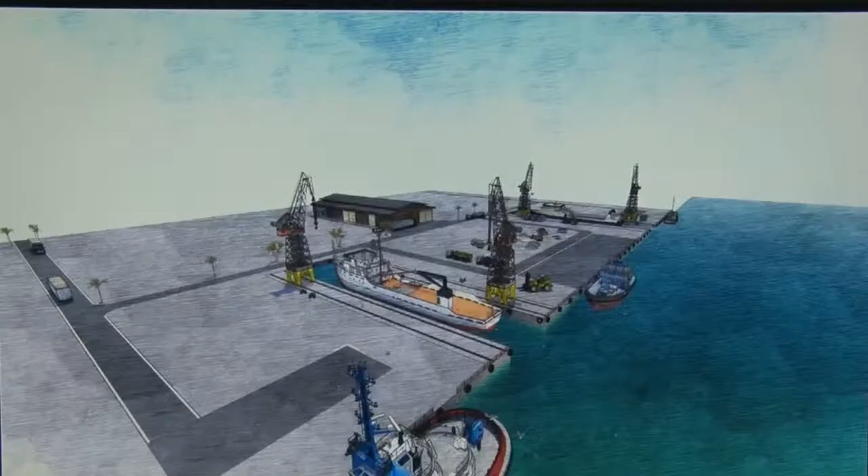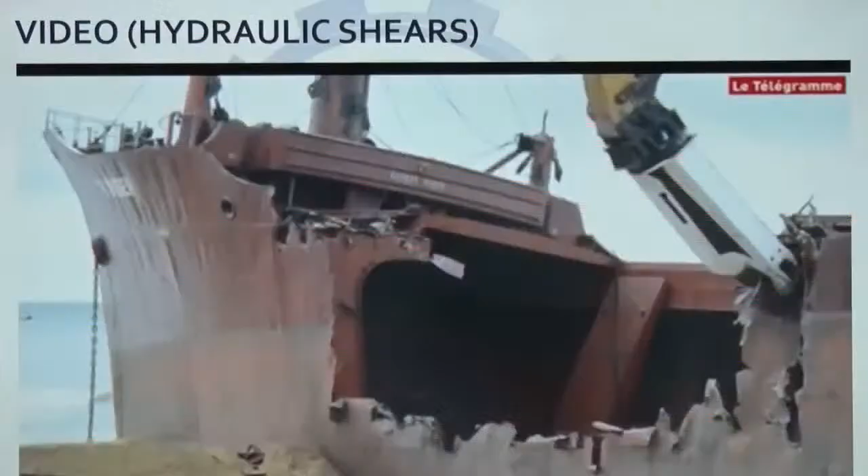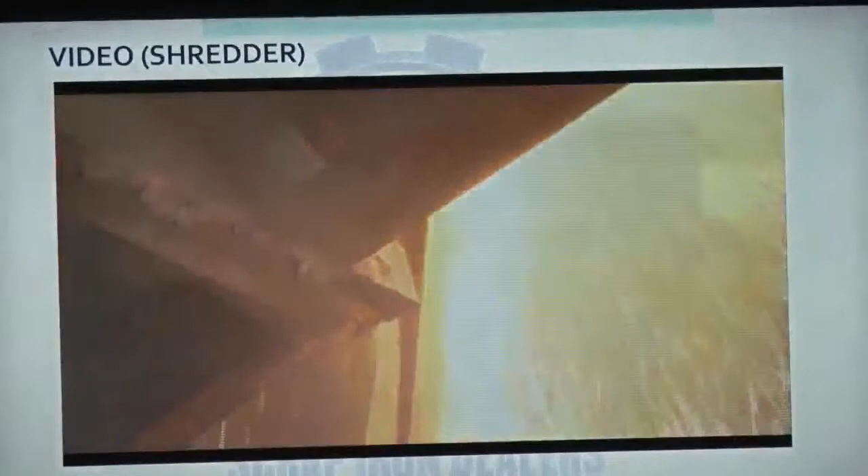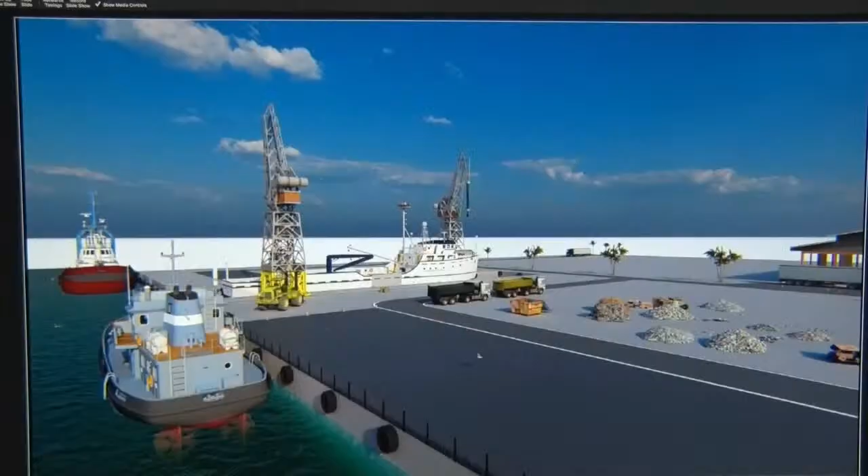This is our site proposal, our site plan. And here you can see fragmentized bits, heaps of material. We see a ship in port, and what happens in shipbreaking? The ship is cut using hydraulic shears. It's fed, that cut piece is fed into a shredder, and then we get that fragmentized bit heap. Now, the heaps are very valuable to us, that is where the value lies.

This is just another view of our port. You can see clearly the gantry cranes, and here we can see it's a two-port proposed operation, so simultaneous cutting operations or breaking can occur simultaneously.

The executive summary: the shipbreaking industry was analyzed. Marine, shoreline, and land equipment was looked at both locally and internationally to determine the best way forward to set up a shipbreaking facility using some of the most advanced technology in the shipbreaking industry. The study looked at different forms of shipbreaking in different lands as far as Turkey, England, and the United States, among others, where the methods employed ranges from labor-intensive to the use of high technology.

It was found that the use of technology quickened the time to scrap ships, thus making this industry a very lucrative one. In addition, it was found that there was no shipbreaking industry in Trinidad and Tobago, the immediate Caribbean, and on this side of the equatorial belt.

The recommendation to government, to viewers, to investors, is to support, allow TTSIDA lands, funds, and permission through its agencies to operate a shipbreaking facility in Trinidad and Tobago, using innovative technology to fast-track shipbreaking, and yet be competitive on the world market. This project will rid the sea of unwanted derelicts and other waste at no cost to the government, and is pivotal to a sustainable environment.

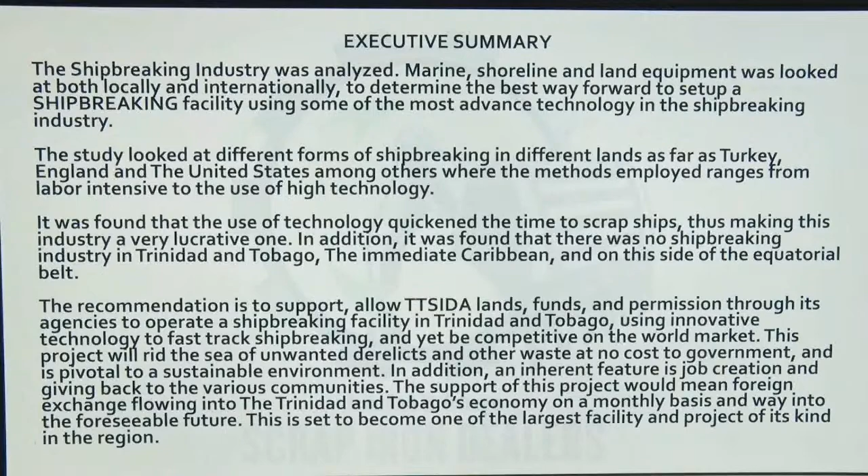In addition, an inherent feature is job creation and giving back to the various communities. The support of this project would mean foreign exchange flowing into the Trinidad and Tobago's economy on a monthly basis and way into the foreseeable future. This is set to become one of the largest facilities and projects of its kind in the region.

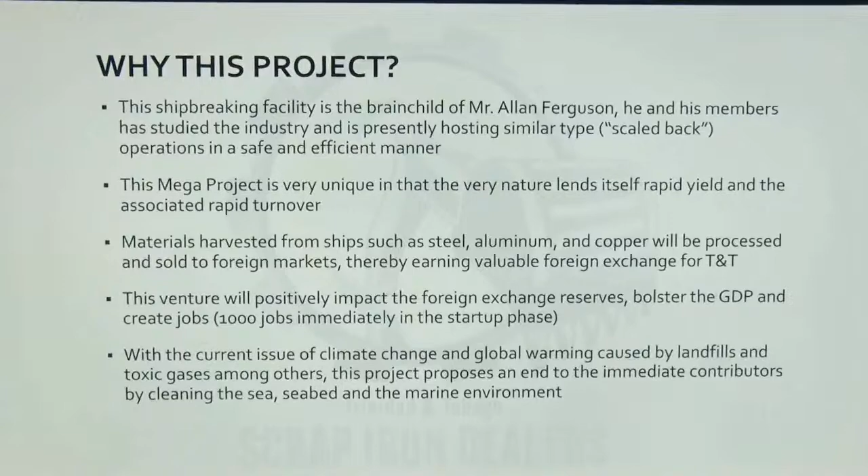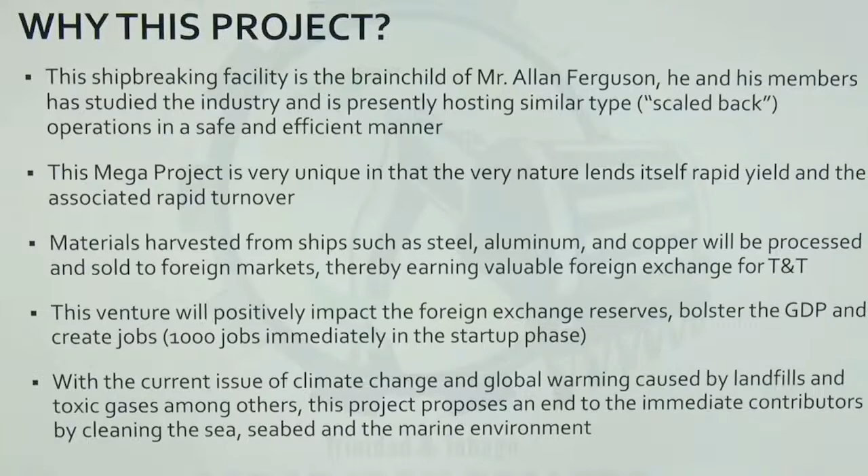Why this project? This shipbreaking facility is the brainchild of Mr. Allan Ferguson. He and his members have studied the industry and is presently hosting similar type scaled-back operations in a safe and efficient manner. Scale-back in terms of, yes, we have yards, so we test the mega project first by safe operations in our yards.

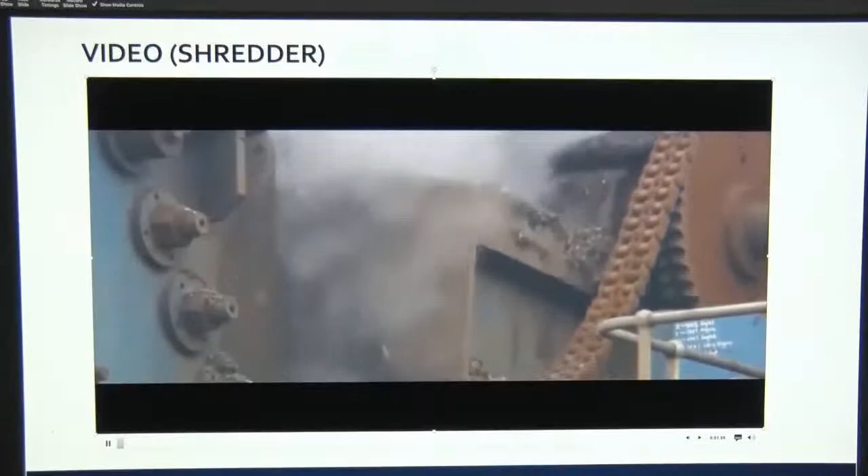This mega project is very unique in that its very nature lends itself to rapid yield, in terms of the fragmentized bits, which has the value and the associated rapid turnover - that is the monetary aspect through sales. Materials harvested from ships such as steel, aluminum and copper will be processed and sold to foreign markets, thereby earning valuable foreign exchange for T&T.

This venture will positively impact the foreign exchange reserves, bolster the GDP, and create jobs - 1,000 jobs immediately in the startup phase. With the current issue of climate change and global warming caused by landfills and toxic gases, among others, this project proposes an end to the immediate contributors by cleaning the sea, its seabed, and the marine environment.

More on why: this project will enhance all areas of sustainability, namely social, environmental, and lend to positive economics. Social - people. Environmental - planet. And of course, this means a positive turn for Trinidad and Tobago.

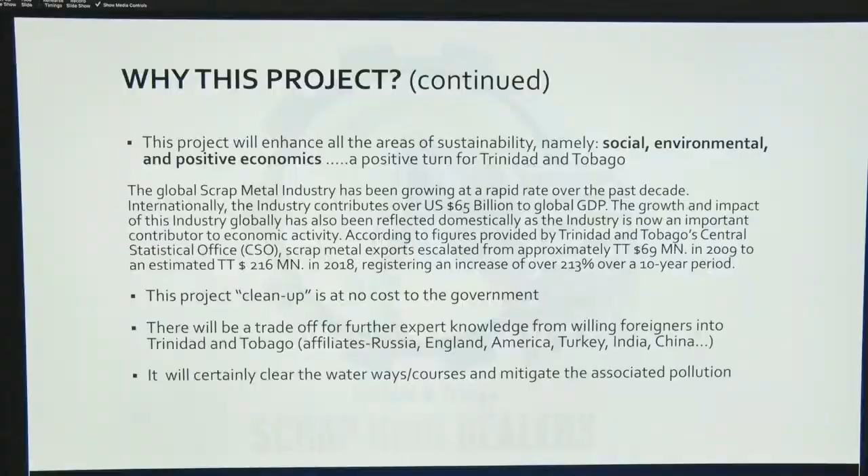Some statistics from the Central Statistical Office say that scrap metal exports escalated from approximately 69 million in 2009 to an estimated 216 million in 2018, registering an increase of over 213% over a 10-year period. TTCDA played an instrumental role in these statistical figures.

Why? This project will clean up the coastal waters of Trinidad and Tobago at no cost to the government.

Another point: there will be a trade-off of further expert knowledge from willing foreigners into Trinidad and Tobago. Our affiliates come from Russia, England, America, Turkey, India and China, amongst a host of others. This will mean an exchange in technology. We will gain. It will certainly clear the waterways and mitigate the associated pollution.

Some history and background: Mr. Ferguson has prior experience in shipbreaking. He owned and operated a shipyard in Carenage, in which the members were involved, so he trained his people. So TTCDA could stand safely, firmly on his footing to say, we want this mega project.

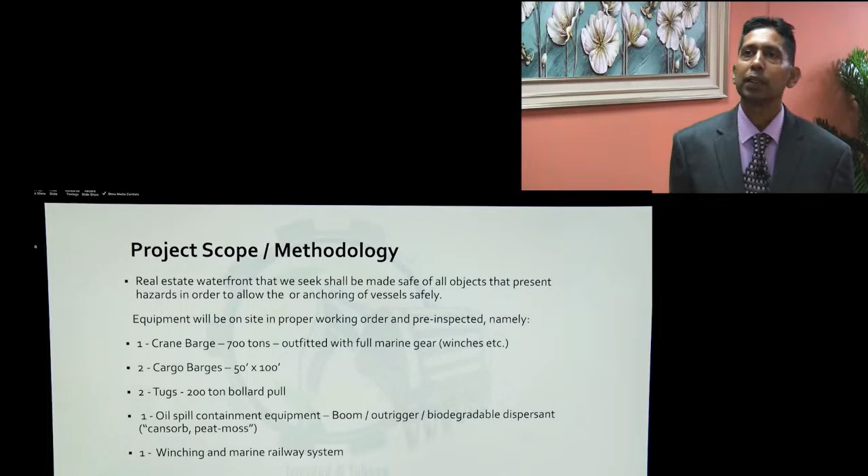Equipment will be on site in proper working order and pre-inspected, namely crane barge, cargo barges, tugs, oil spill containment equipment complete with its boom, its outriggers and dispersant, winching and marine railway systems, telehandlers, excavators, lift trucks, cranes both fixed and mobile, our shredder. We have as well trucks, complete cutting sets, and industrial scales.

With using this equipment, we consider the focus. On startup, we focus on land and shoreline operations. Once the vessel is docked, towed or winched close to land or onto land, checks are made to ensure safety, and the vessel is cleared of all liquids, chemicals and hazardous substances in a safe manner using the EMA guidelines and international standards.

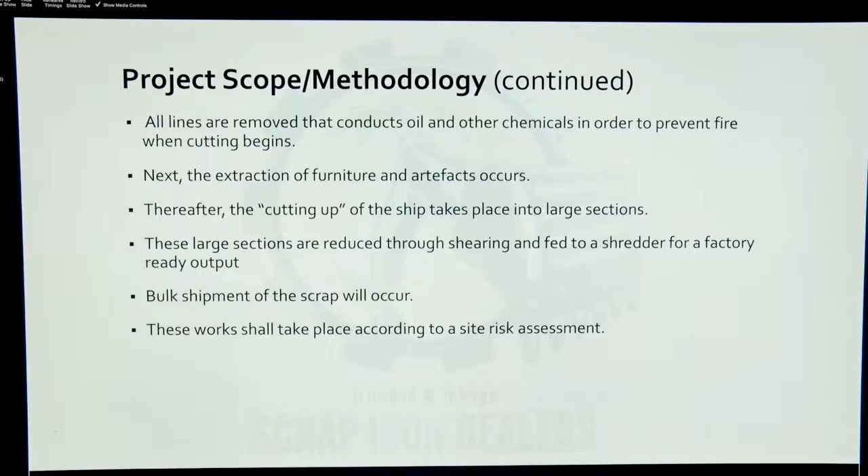All lines are removed that conduct oil and other chemicals, in order to prevent fire when cutting begins. Next, the extraction of furniture and artifacts occurs. Thereafter, the cutting up of the ship takes place into large sections. These large sections are reduced through shearing and fed to a shredder for a factory-ready output. Bulk shipment of the scrap will occur. These works shall take place according to a site risk assessment.

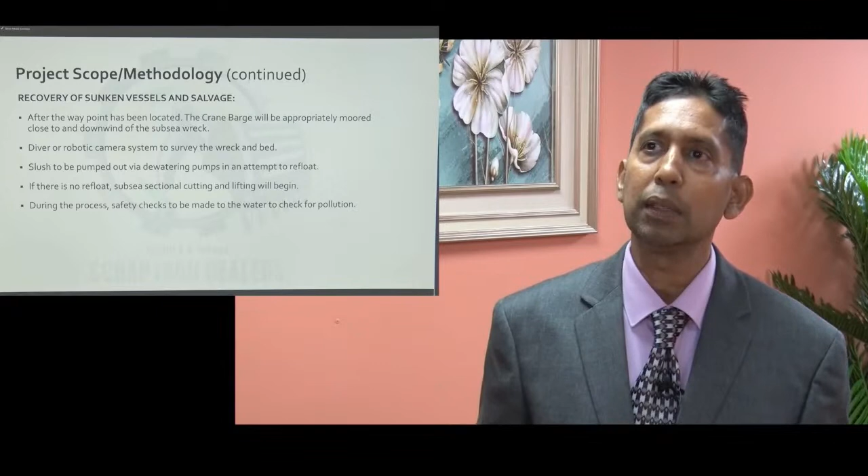On the ongoing phases after phase 1, we shall have recovery of sunken vessels and salvage. After the waypoint has been located, a crane barge will be appropriately moored close to and downwind of the subsea wreck. A diver or robotic camera system is sent in to survey the wreck and bed. Slush is to be pumped out via dewatering pumps in an attempt to refloat. If there is no refloat, subsea sectional cutting and lifting will begin.

During the process, safety checks are to be made to the water to check for pollution. Once there is no pollution, cutting in sections can begin via torch or chain system. During cutting, the crane shall hold steady the wreck at key points to enable stability and the safe lifting thereafter of the cut section.

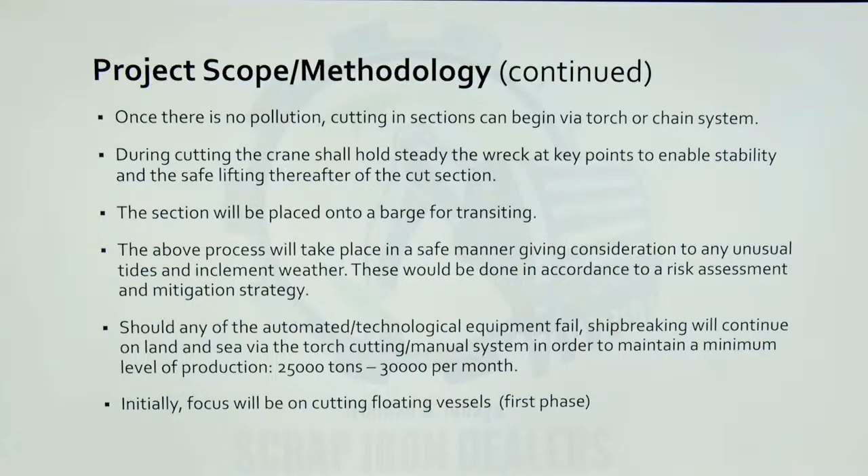The section will be placed onto a barge for transiting to shore, where it can be shredded up and made into that valuable fragmentized bit. The bits will end up in heaps. The above process will take place in a safe manner, giving consideration to any unusual tides and inclement weather. These will be done in accordance with a risk assessment and mitigation strategy.

Should any of the automated or technological equipment fail, shipbreaking will continue on land and sea via the torch cutting or manual system, in order to maintain a minimum level of production between 25,000 tons to 30,000 tons per month. Remember, initially the focus will be on cutting floating vessels only.

We now have a video of the hydraulic shear.

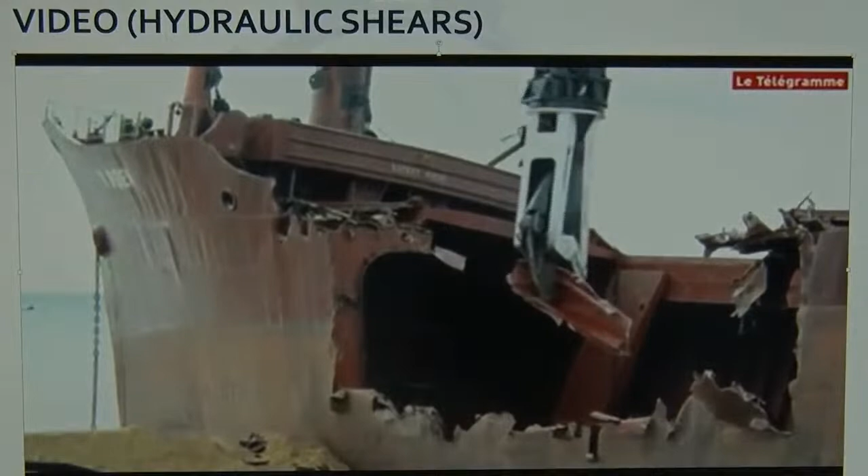Now we have a video of the shredding process. You can see our shredder.

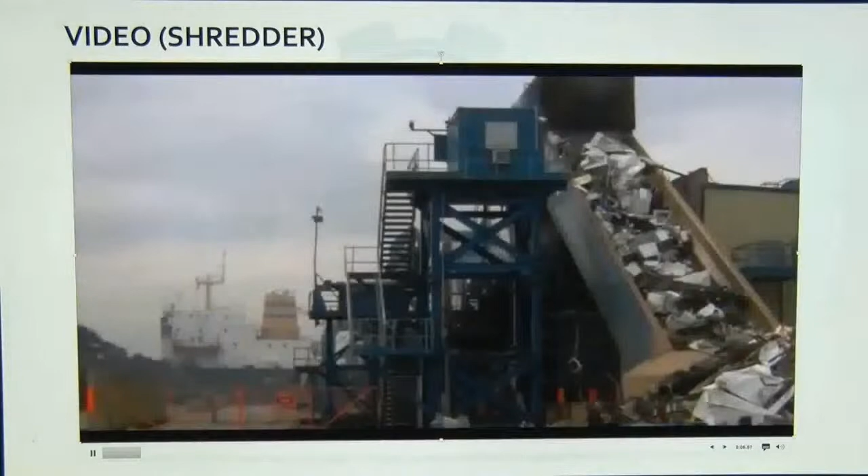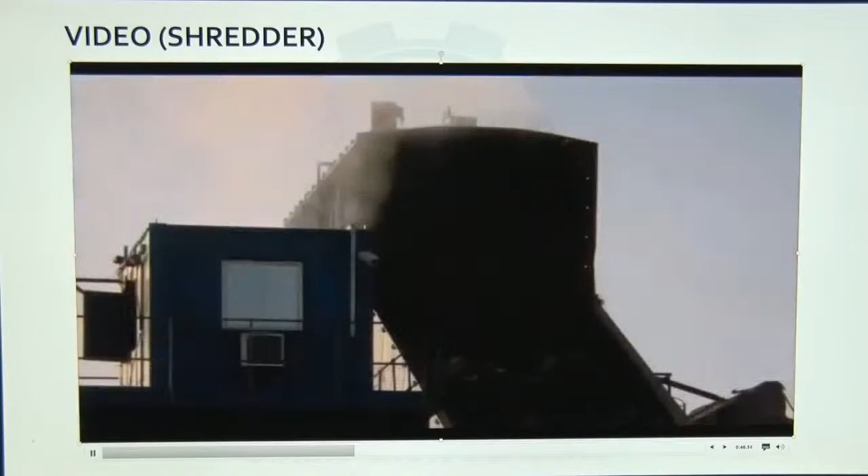This is the best shredder in the world, and it faces a world-class challenge. A giant freighter powers towards the docks, but it can't stay long. This ship must leave in 72 hours, complete with 27,500 tons of top-quality metal splinters created by the shredder. Producing the payload fast enough will push this industrial giant to its limits.

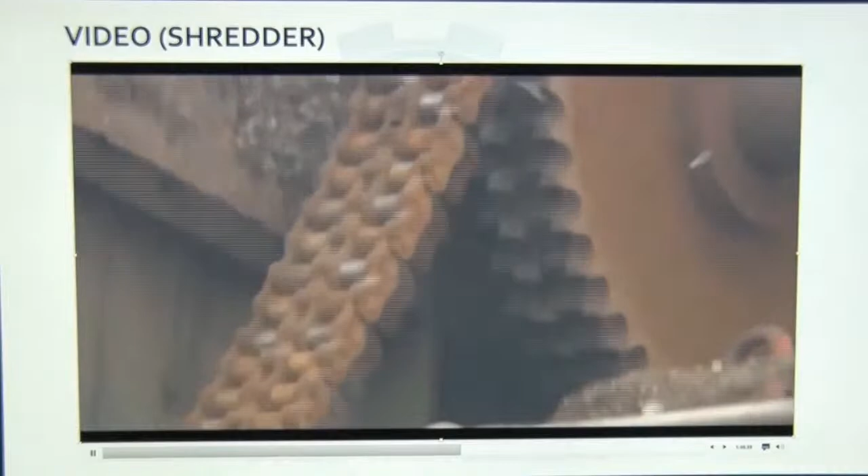A 560-ton giant of heavy industry, this shredder smashes 350 tons of metal to pulp every hour. The power from this industrial machine...

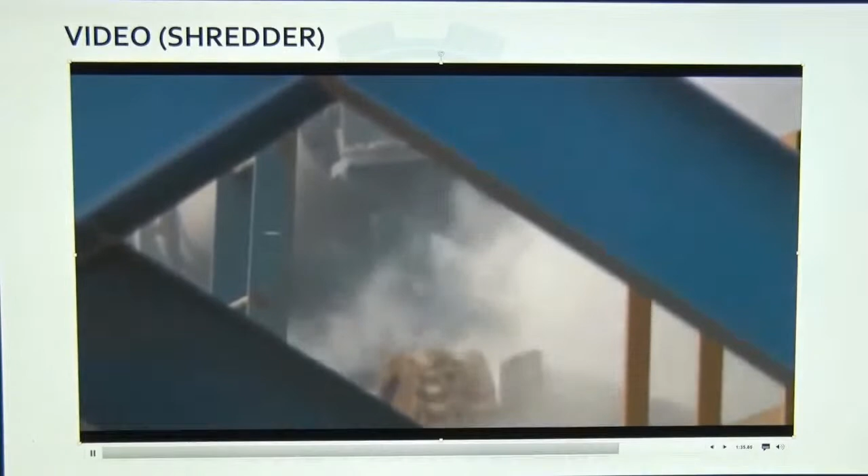We call it fragmentizing. It's actually what they call a fragmentizer. So what happens is you've got a big hammer spinning round, and you've got a load of grids. The scrap goes into the middle, the hammers come round, smash it, and eventually force it to a set of grids. Once it falls out the grids, the material actually separates out.

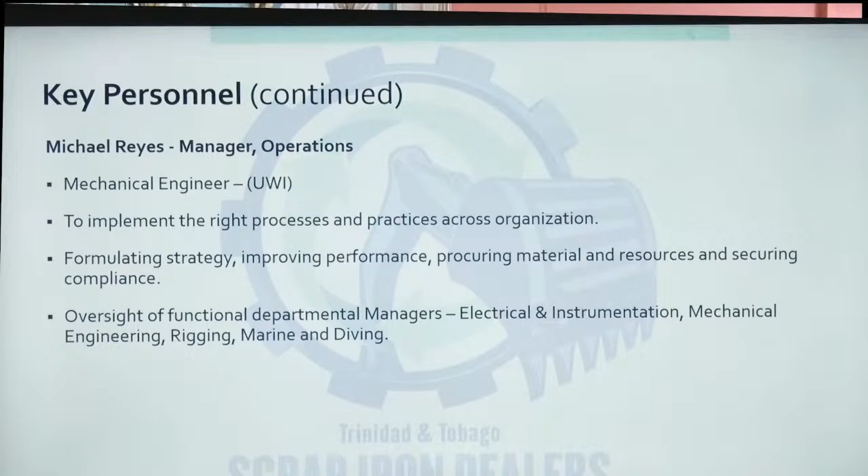We have our Vice President, Mr. Eros Sijatan. We have our Health, Safety, Security, Environment and Quality Director, Ms. Amanda Harilal. We have our Operations Manager, Mr. Michael Reyes. We have our Civil and Mechanical Engineer, Mr. Ronald Ayong.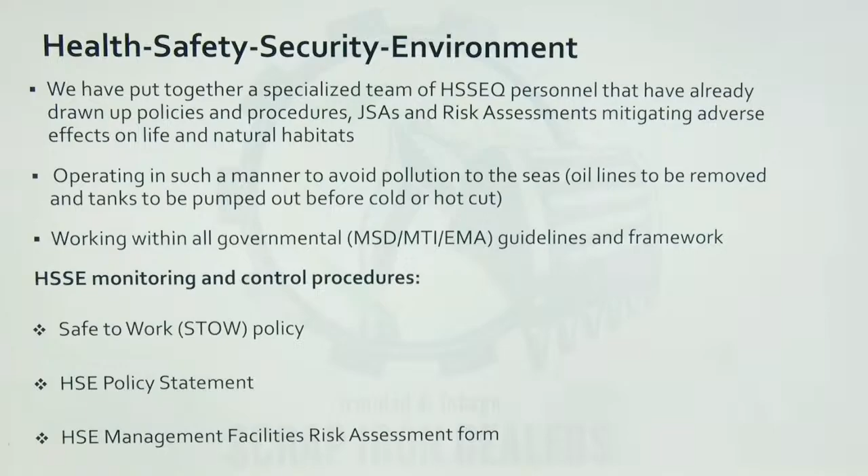We'll be operating in such a manner as to avoid pollution to the seas. We'll be working within all governmental guidelines and framework. The regulating bodies are the Maritime Services Division, the Ministry of Trade and Industry, and the Environmental Management Authority.

Some of our monitoring and control procedures are our Safe to Work policy, our HSE policy statement, HSE management facilities, risk assessments, equipment control procedure, disciplinary action matrix, and contractor management procedure.

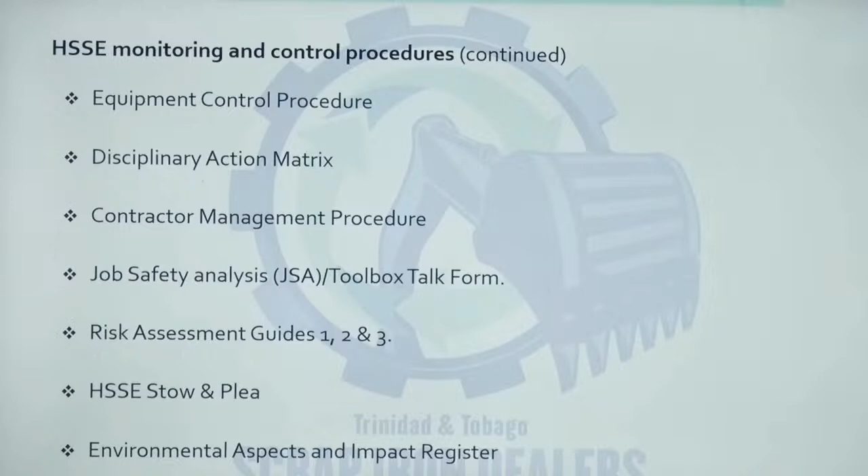HSSE Stow and Plea, environmental aspects and impact register, and we are guided by OSHA's risk hazard matrix.

We want to be in the green zone at all times, sometimes in yellow, but mainly in the green zone.

We have our risk management plan put in place. Here we mitigate risk, we accept risk, we transfer risk, and also avoid certain types of risk.

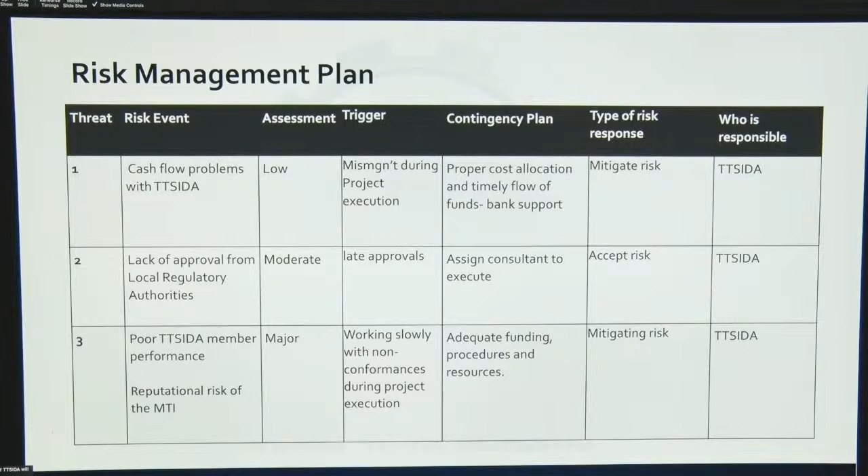Our financial input for startup is 30 million. 30 million.

So to recap, this mega project, our ship-breaking project, will save the environment, will immediately create jobs, will bring in the much-needed foreign exchange, will encourage recycling. At what cost? All of these will be at no financial cost to the government.

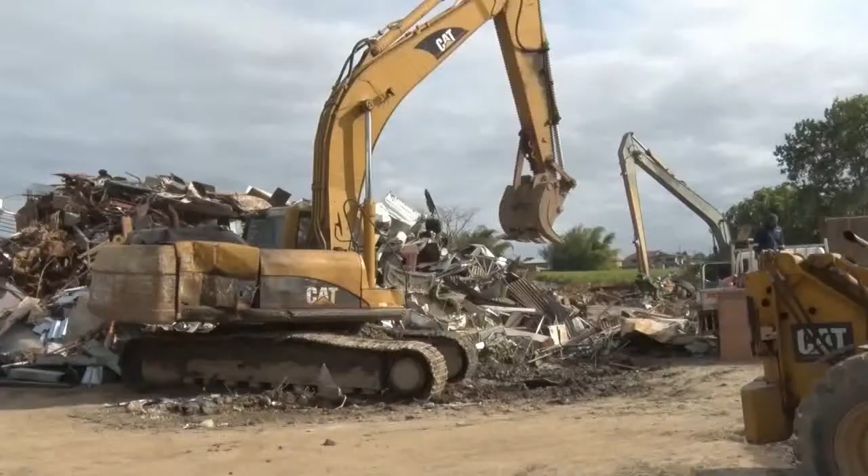He adds that this project will not add any strain to the government of Trinidad and Tobago. According to the president, the association is aiming to keep the foreign revenue in the country. As a result, he announced that the project is open to local investors, with a 35% stake available to these local investors.

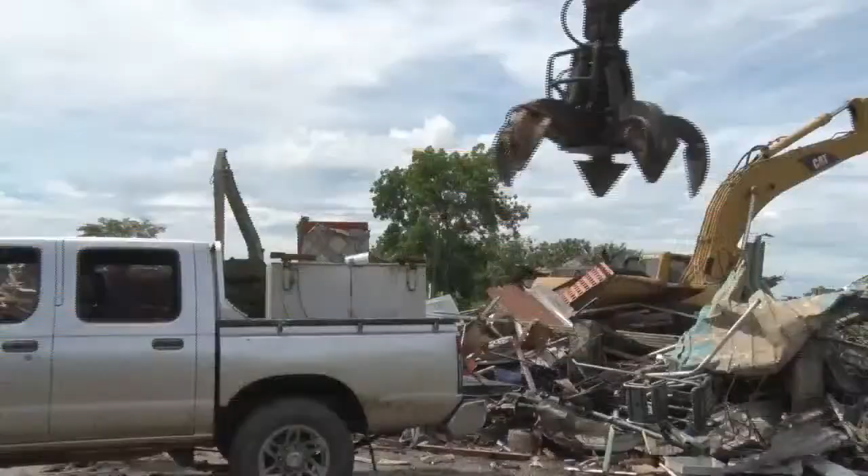You get up one morning, your elders have something, you don't know how they get it, but you want to use it. Ask the old people what they went through, and they'll say: black man got to keep on jamming, for black man to get a little something. Make up your mind to work 10 times harder because of your color. People rob you, humiliate you, whip you, and then they free you. So when you get a little something, watch your back, because black man don't get nothing easy.

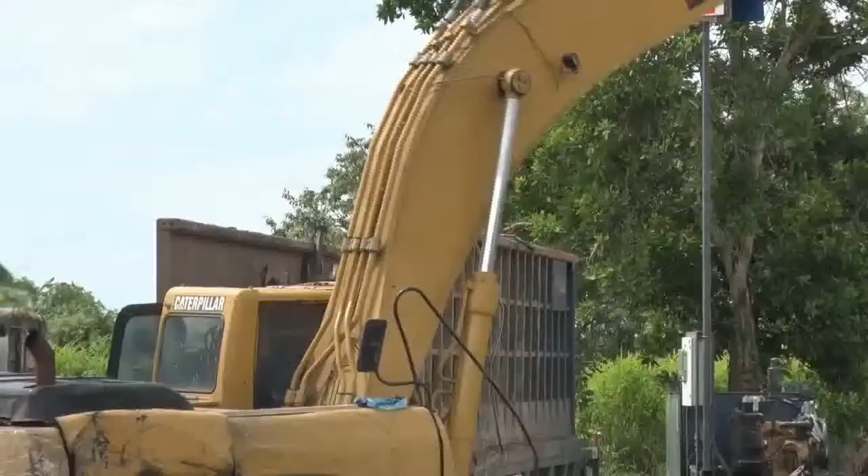You get up one morning, oil money running, how it come you don't know. But if you read about Uriah, you'll find out about the pressure, how they got so much, whole hell, get a penny from TLL. Black man got to keep on jamming, for black man to get a little something. You got to take up your own cash money, pay people for your own refinery. Make up your mind to be a magician, to make money out of scrap iron. So when you get your little something, keep marking, because black man don't get nothing easy.

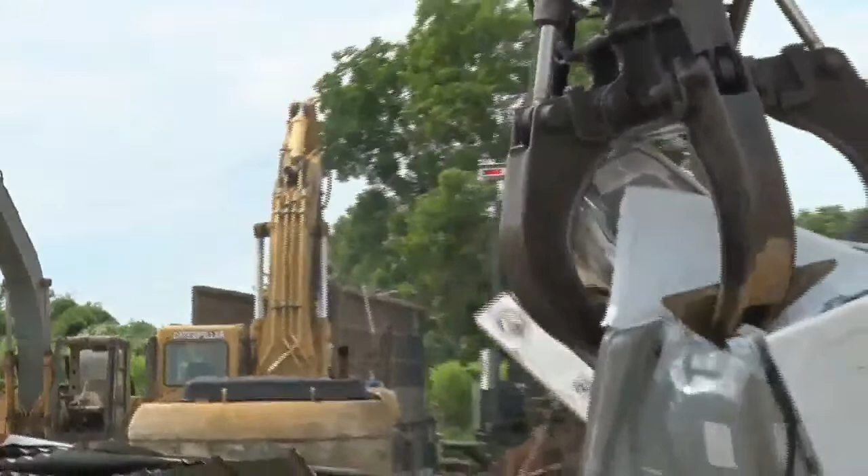You get up one morning, independence happening, you think the thing come easy, you start taking liberty. But we had to send a petition to England for some woman to tell we this colony free. Black man have to keep on jamming, for black man to get a little something. You got to go to conference in London to get independence in your own land. If they enslave you, whip you, sell you, and then they free you. So when you get a little something, keep marking, because black man don't get freedom easy.

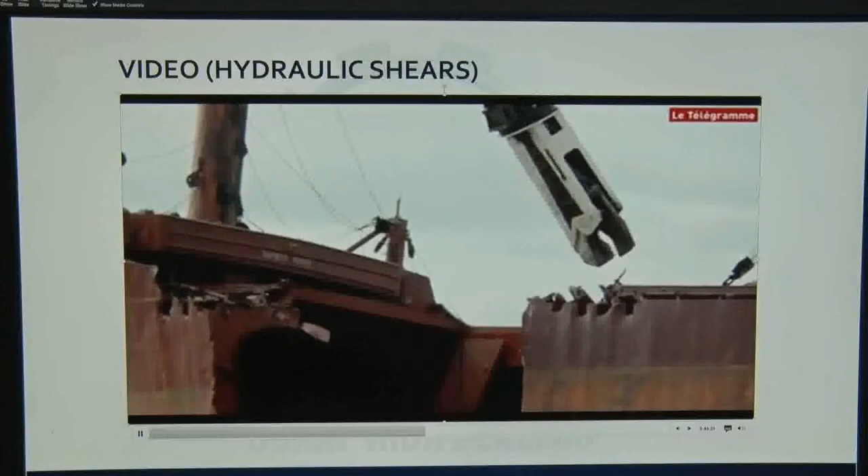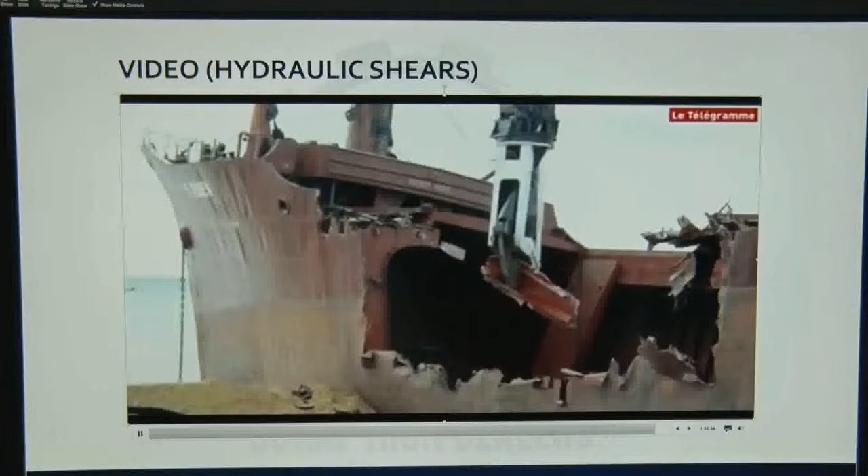So when a black man has something, you got to start thinking, you don't get it easy, you got to practice economy. From getting licks from the slave master to become the landowner is a terrible journey, black with plenty brutality. Black man got to keep on jamming, for black man to get a little something. You must make up your mind that you're able to get money and jam with the devil. You got to make up your mind that you're ready to swim on shore and rock your boat steady. So when you get a little something, watch with a hawk, because black man don't get nothing easy.

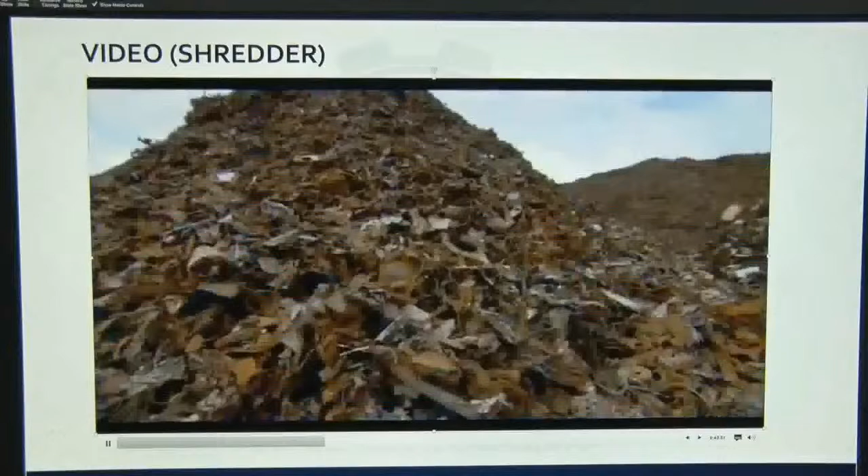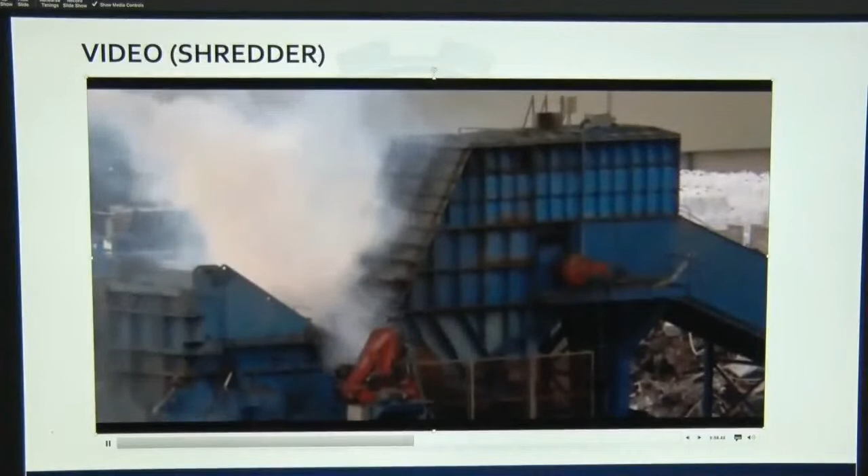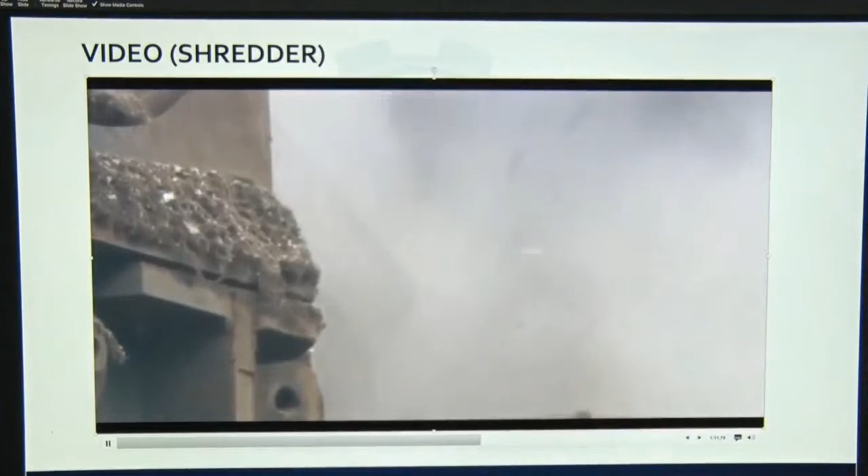Black man got to keep on jamming, for black man to get a little something. You got to put up a petition in England to get independent in your own land. Make up your mind, brother, that you're able to get a bully and fight down the devil. People rob you, humiliate you, turn and leave you, lash you. Black man got to keep on jamming.